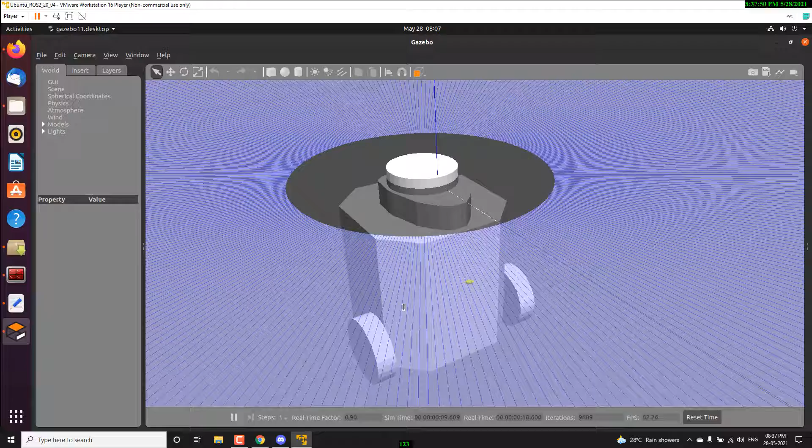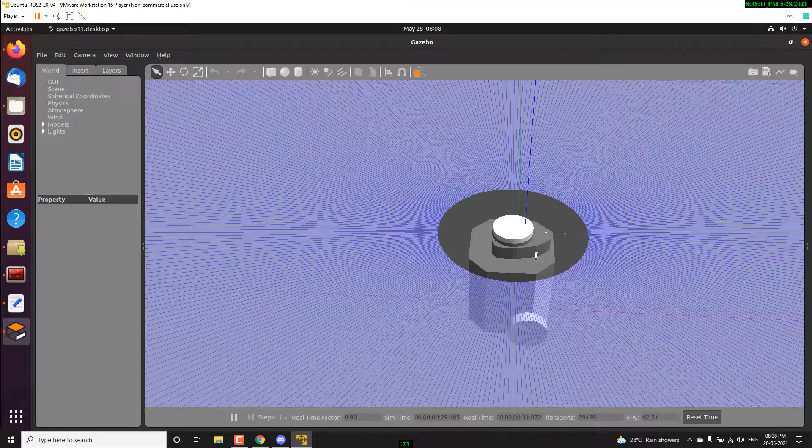But compared to the ROS1 Turtlebot 3, here they are only using plain meshes. It's not very detailed, but if you remember in ROS1 when you worked, it was very detailed. I think currently they are only using plain meshes like this, and that is actually enough for the simulation. So we have started the Turtlebot 3 simulation. Now you can play with it.

Just check the topics, ROS2 topic list, so you can see the command velocity. If you just want to control the robot, you can publish the command velocity. So just take the RQT, and these are the nodes that are currently running, I guess. Let me close this, and I'm just starting the robot steering plugin. You have to install it from the Synaptic Package Manager, so if you just search steering in Synaptic, you will get the RQT robot steering plugin.

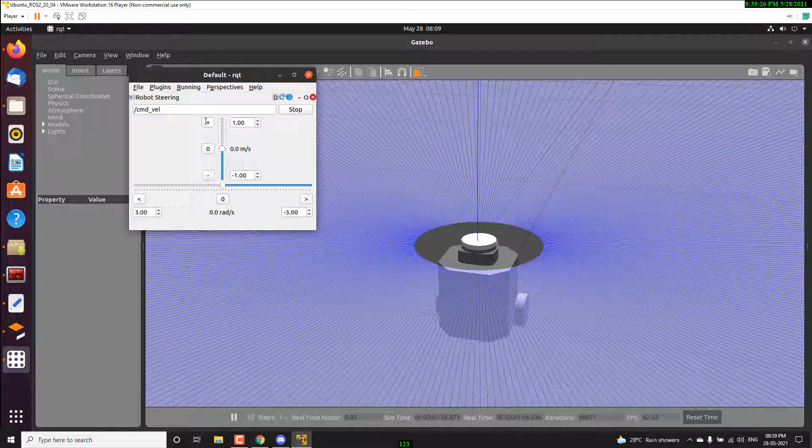So now Foxy has a lot of packages. I think you can currently start working with ROS2 because the package support is very huge now, so you will get almost all the packages for ROS2. We get the steering plugin in RQT. Now just move it, just move it. And if you want to put any obstacle around it, you can put it.

And I just want to visualize the laser scanner. So ROS2, let me open the RViz config. I'm not sure about the RViz config, maybe let me use some existing configuration. Just a second, they may have some commands to start ROS with some configuration file. Let me check, yeah, I think this. Let me try, ROS2 launch.

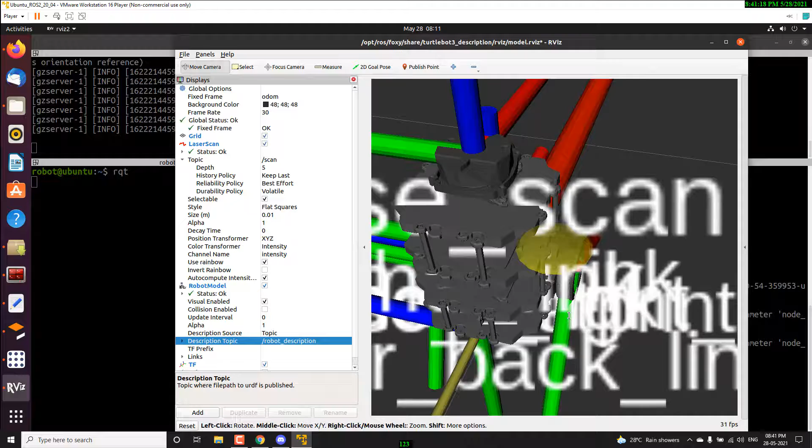Turtlebot 3, then on the bring up, there is rviz2 launch. Let me check whether... okay, I think this is the thing. Yes, okay, so you can see the Turtlebot 3 here, but I think the visual meshes are more textured. But the simulation meshes, I think they are using the collision meshes, I guess. So you can see the laser scan in RViz.

You can just set it up like this, okay, you can see the transform. So in order to visualize the robot, we have a launch file called turtlebot3 bring up, and inside the folder there is rviz2.launch. So you can visualize the robot, and at the same time, if you want to control it, you can use the RQT steering plugin. By the way, in ROS2, the ROS parameters are actually like dynamic reconfigure parameters. If you remember the dynamic reconfigure parameters in ROS1, those are the parameters that we can change dynamically. In ROS2, by default, all the parameters are like that. So here you can see the robot model, then the odometry.

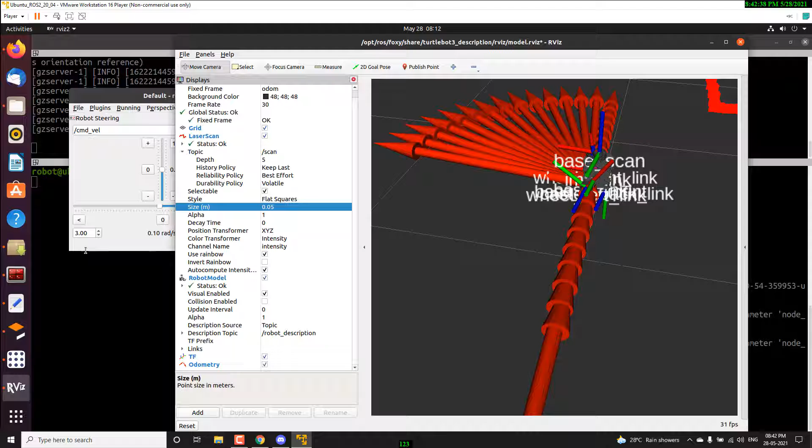Okay, so this is the Turtlebot 3 simulation. Let me close this and show you how to start the navigation using the simulation of Turtlebot 3. There is no difference, the steps are the same. After the demo, maybe I will explain about the ROS2 navigation stack in detail.

So first we can start the Turtlebot 3 simulation. We have the package called Turtlebot 3 Gazebo and the Turtlebot 3 world, that is the launch file. Just copy paste. When you work with Turtlebot 3, you have to set the Turtlebot 3 version or name. You have to export Turtlebot3_model equal to burger or waffle, these are the two models available. Then only it will work. This is exclusive for Turtlebot 3, not for other robots.

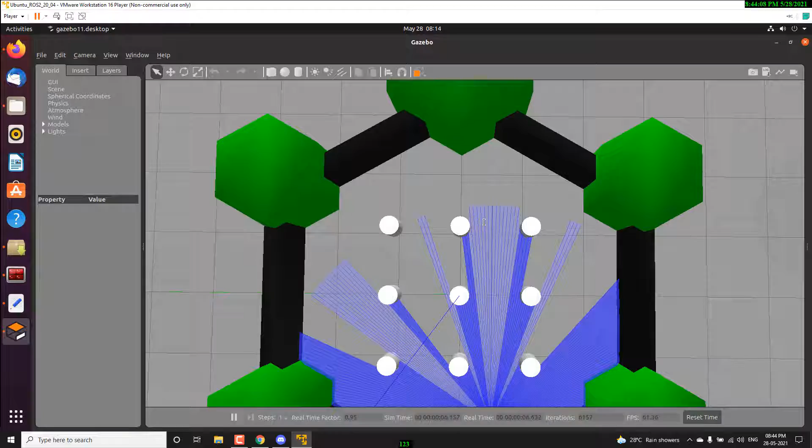So let me start the world file. We are actually trying to do the navigation. Navigation involves first the mapping, then the autonomous navigation. So first we have started the simulation of Turtlebot 3, the same Turtlebot 3 environment that we have seen in ROS1.

Now what's next? We have to start mapping. For mapping, we are using cartographer. I already explained about the Google cartographer package, which is very good for mapping the environment. You can easily launch the cartographer launch file from the Turtlebot 3 cartographer package: ROS2 launch turtlebot3_cartographer cartographer.launch.py, then also setting the simulation time equal to true.

Now starting the cartographer. So when we start the cartographer, it seems like it's building the map. You can see a rough mapping.

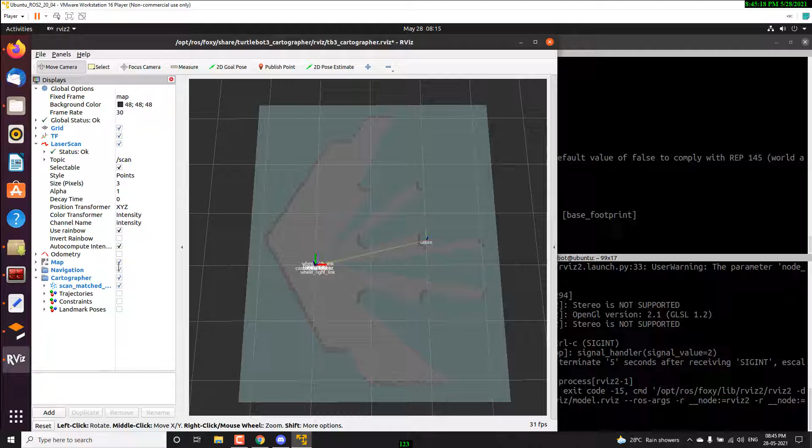Now what's next? We have to map it, right? So for that we have to start the teleop. There is a package for doing the teleop, Turtlebot 3 teleop. Just start here. Now we can simply move the robot. You can see the robot start moving, and just move it around.

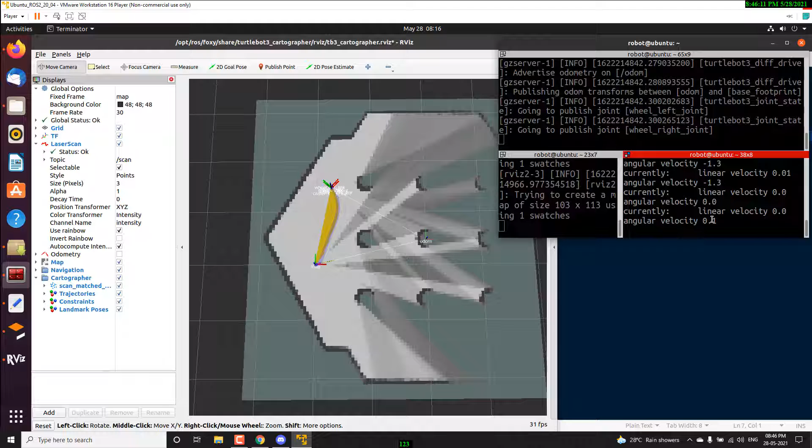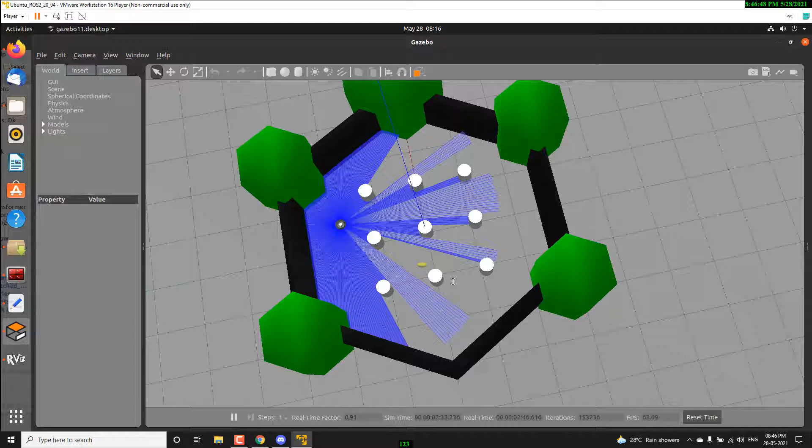You can simply try to... oh, it's hit the wall. It's actually building the map very fast. So the robot is here. Now I'm just moving and you can see the map is building. So I think you can see the map is getting built, right?

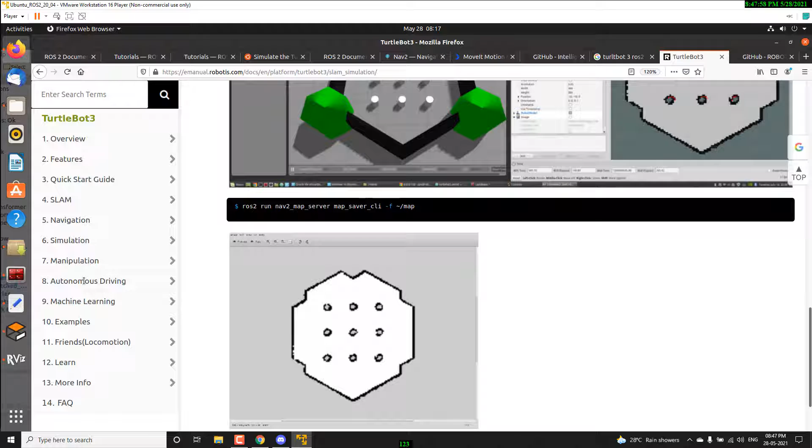Yes, so now we can save the map. After creating the map, you can save the map using this command. We had a package in ROS1 called map server, right? But in ROS2 it's nav2 map server, inside that we have a node called map_saver underscore CLI. In ROS1 it was map server only. After that we can just mention the path. I already saved the map in the home folder, so I'm not doing that now. I can show you the created map in my home folder, so this is the map that I already created.

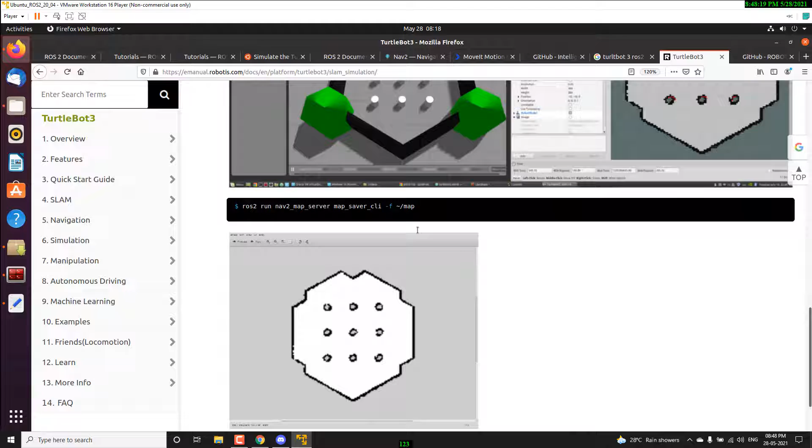Yes, so now what's next? The navigation, right? Autonomous navigation. So let me start the navigation. First we have to start the simulation again, just copy paste.

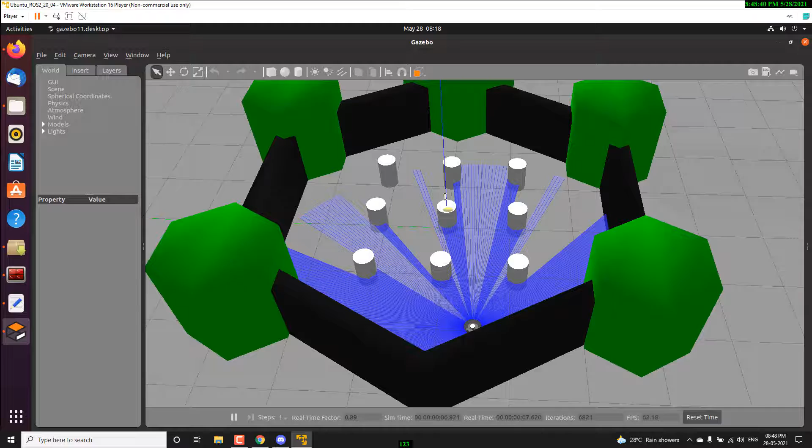Yes, so we have started the simulation. Now what's next? We have to do the navigation, right? So there is a package called Turtlebot 3 navigation 2, inside that there is a launch file, so just mention our map as well. Now start the navigation launch file.

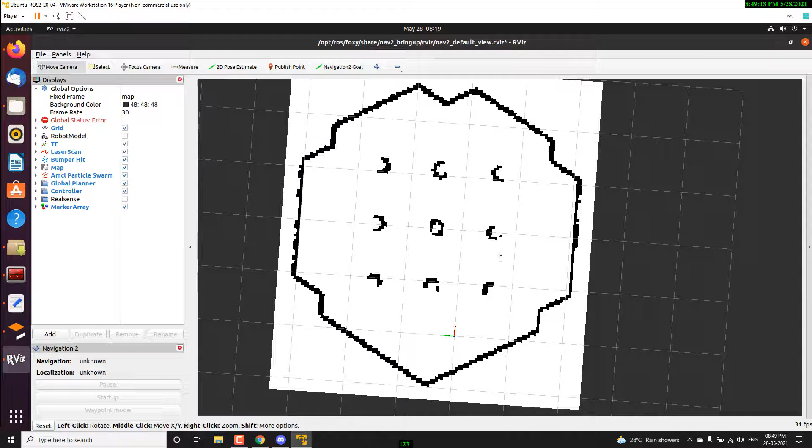Okay, it started, we have the RViz with the map. In order to start, first we have to initialize with the 2D pose of the robot. You can set it here, rough pose of the robot, you can manually set the pose if it's not correct, and after that you can simply do the nav goal. It will create the path and do the navigation.

It's almost the same as Turtlebot, ROS Noetic. I found this navigation stack is much better than the ROS1 navigation stack. Maybe when we start explaining the concept of navigation 2, you will understand the blocks of nav2, it has a lot of features. But if you know navigation stack 1, then you can easily configure all this stuff. Basically setting the navigation stack and all, there is no code involved, it's all like using our logic. We have to set some configuration files and launch files, that's it.

So now we are working with navigation 2 from ROS2. Let me close this and let me explain about the new navigation stack, navigation stack 2. Maybe you can take this website, the official website of navigation stack 2, and we can see what are the new things inside the navigation stack. Just a second.

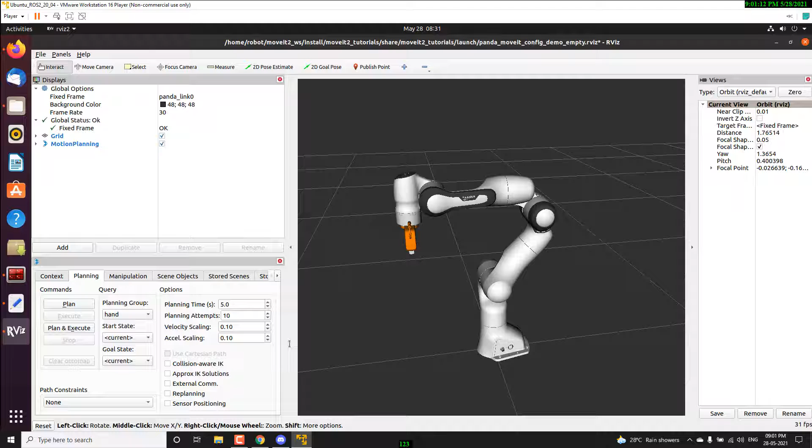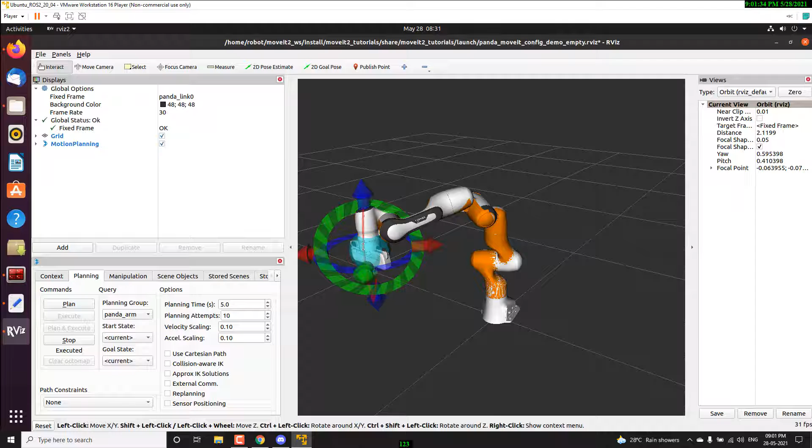I can show you the example using the Panda robot. You have to add the motion planning display type, the same motion planning plugin. There is not much difference. We have the robot here, and if you change the hand to Panda arm, we get the interactive marker. Just move it, then plan and execute. It's the same thing, right? Currently it's executing in the fake controllers.

So this is MoveIt 2 with an example. There are not many differences as per my understanding. You can simply follow this tutorial like ROS1. Just change to Foxy and follow the steps to install MoveIt and set these things to see the example. I'm not explaining in detail, it's almost the same as ROS1.

Now I want to show you the perception stack, basically the images, USB cam and all. How to work with the USB cam in ROS2. Let me close this stuff and show you. I'm working from VMware, so I want to add the camera. I'm connecting. Seems like it's connected, and I'm checking using the Cheese application. It's working, this is me. So currently the camera is working.